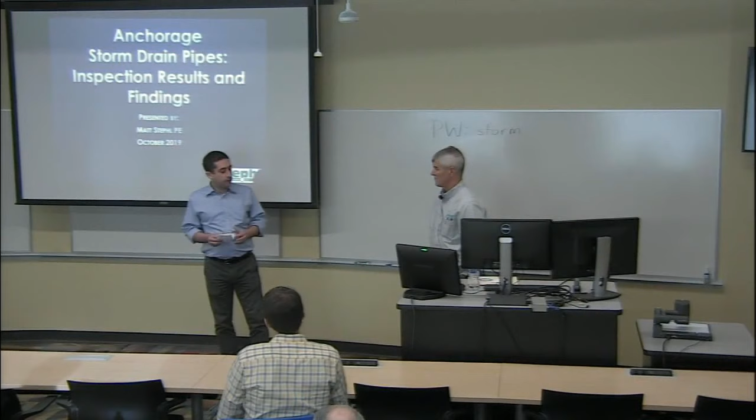Our presentation today is on Anchorage storm drain pipes, inspection results and findings. And our presenter is Matt Stephl. He's a PE. So I'll let you introduce yourself.

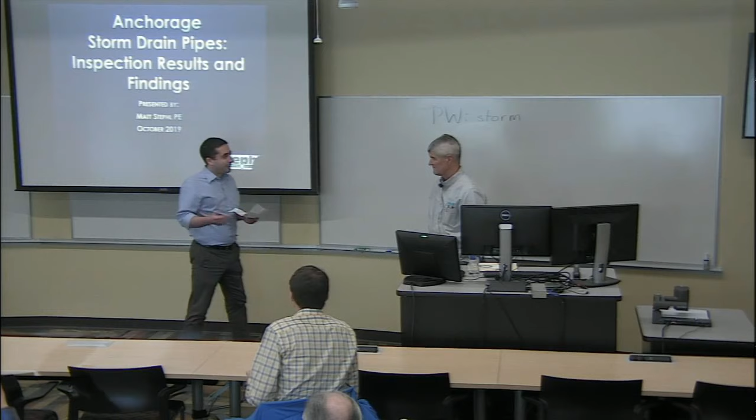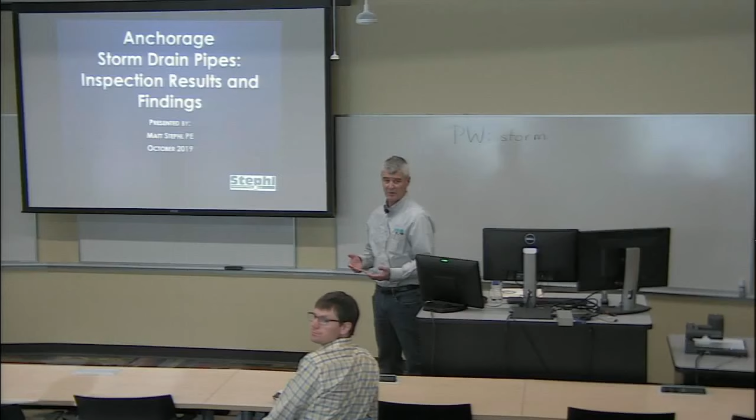The topic is Anchorage storm drain pipes, inspection results and findings. My name is Matt Stephl. I own an engineering company here in town. We specialize in condition assessment. We inspect pipes, underground pipes. We also specialize in repairing those pipes with trenchless technology. So the talk today is really a big part of the business that we're involved in here in Anchorage.

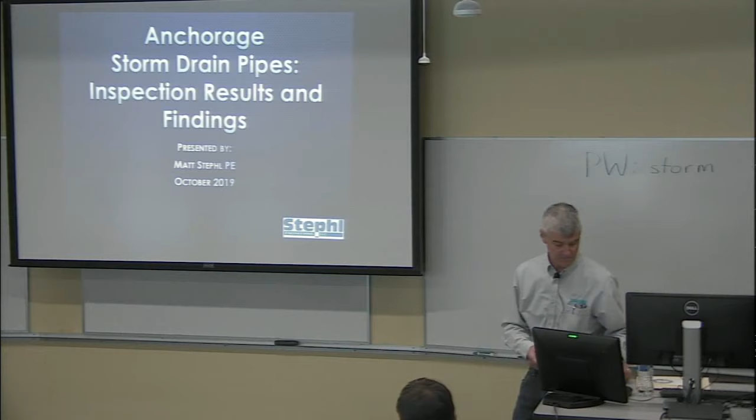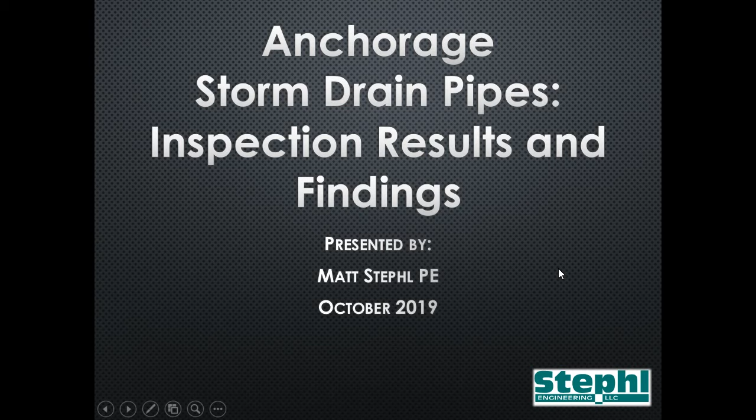See if I can get this thing to work. Here we go. Okay, thank you. All right, we'll keep moving here.

A little background about the topic for today. Anchorage is right now forming a stormwater utility. It's going to encompass all the stormwater pipes in the greater Anchorage area. The majority of the pipes are owned by the city of Anchorage, roughly about 80%. The remaining portion of the system is owned by the DOT, and there are some other private systems as well. One of the real driving factors here is that there are well-known serious problems with the corrugated metal pipe in the existing system. And that's really what the talk today is about.

As you well know, this issue is getting a lot of press lately. There was a newspaper article just this week on Wednesday on the front page about fixing the aging drain pipes as the city pursues a new stormwater utility. There have been a number of topics in front of the Anchorage Assembly about this issue. Some ordinances have been passed. They're moving forward, and they've also had some engineers and consultants involved in developing documents for them, which I'll talk about today.

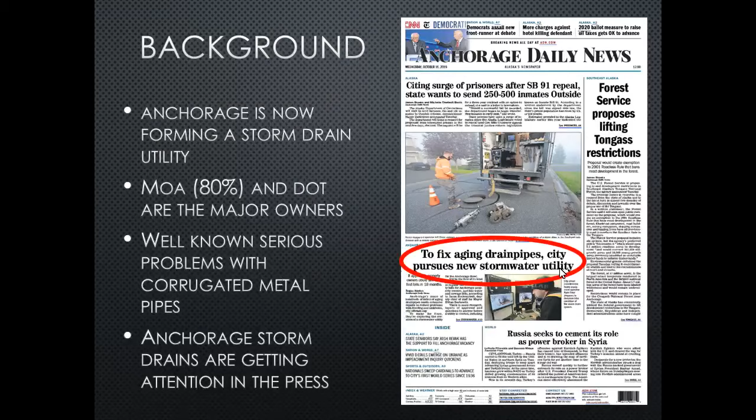And that's the wrong way. There we go. So what does a stormwater utility do? The primary purpose is to keep the storm drain system operational, make sure it functions correctly, maintain it, clean it, etc. And the purpose is to minimize problems in the city. Sinkholes, flooding. The picture on the right is a photograph of a flood caused by Chester Creek in the area of Arctic Boulevard and 19th Avenue.

Defective storm drains can cause property damage. Emergency repairs. It's interesting that I'm here in the UAA building today, and there's an emergency repair happening right next door on 36th Avenue to repair a culvert that carries Chester Creek, and they had that road shut down for a couple of months this fall. So that's one of the things that a stormwater utility would try to prevent, emergency repairs.

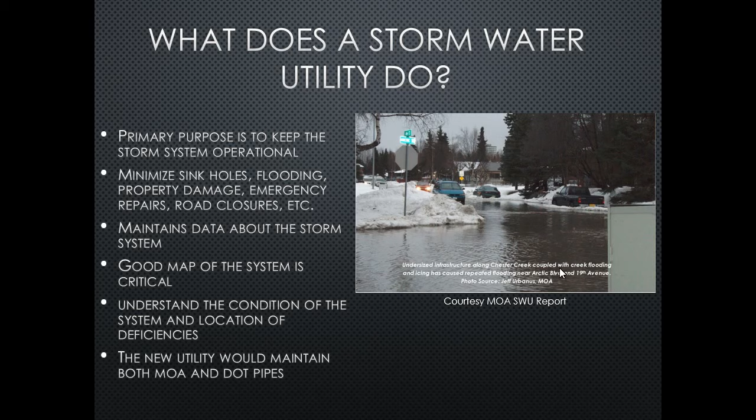A stormwater utility is also going to have a lot of good information about their system, mapping. They're going to understand what kind of condition their system is in, the location of where the problems are. And in our case here, the new utility, if it does eventually form, would maintain pipes that are owned both by the City of Anchorage and also the Department of Transportation.

So there was a study that was completed by the city. It was finished in January of this year. I'm going to talk a little bit about that. Basically, it's a guide for starting the new proposed stormwater utility in town. And it was completed by a number of qualified consultants here in Anchorage, some qualified engineers. It's a pretty good study. And they made some statements that I'm going to visit here. They identified that there's a lack of good data about the existing system. And we know that from our personal experience working on it.

They determined that the storm system in Anchorage is about 525 miles long. That's the pipe portion of it. That doesn't include the open channels and the streams, etc. Their report did not include any field inspection work, which is what I'm going to talk about today. But what they did do was a desktop analysis of the condition of the existing system, and that work was finished late in 2017, so it's about 2 years old right now. But it was a desktop analysis. They really didn't do any field work. They interviewed engineers who work with the city. They interviewed O&M staff and talked to both state and City of Anchorage engineers.

In that report, they estimated that about 70% of the system here in Anchorage is corrugated metal pipe. That's about 380 miles of corrugated metal pipe. They also made the statement that all that CMP pipe is at or near failure today. Then there was a statement early in this study that MOA staff had predicted that it could cost up to $1 billion to bring this existing storm system up to standards. That's a big number for a community like ours.

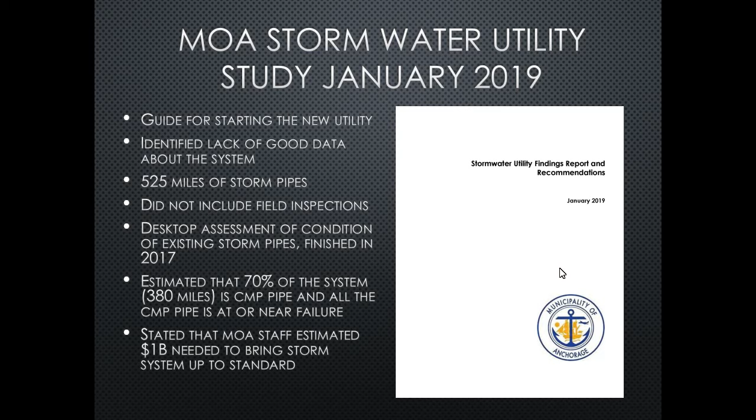So today, what I'm going to talk about is CMP pipe and its failure mechanism. I'm going to talk about the condition of the Anchorage system based on some work that our firm has done recently, and then I'm also going to evaluate the results of the field data and give you a little bit more information about what the findings were from the work that we did.

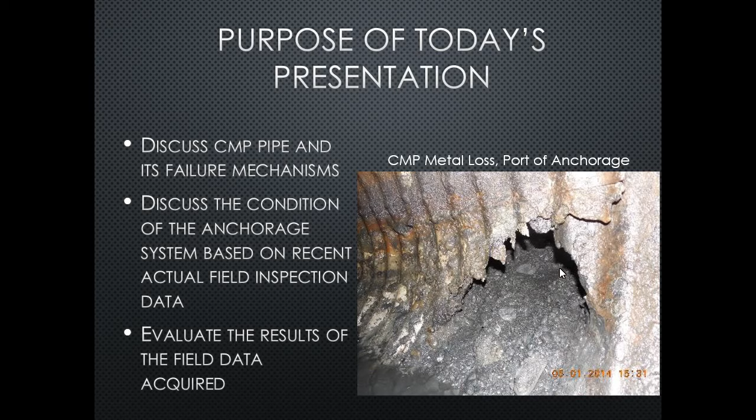And here's a picture right here, a classic CMP failure. This is a CMP pipe located down at the Port of Anchorage. The sidewall is missing, got soil coming into the pipe. This happens to be a piece of CMP pipe that gets submerged in tidewater twice a day. So very, very susceptible to attack by corrosion.

In Anchorage, predominantly most of the pipe is galvanized steel pipe. There is some aluminum pipe in Anchorage, but the majority of it is galvanized steel. There's a lot of different variations of corrugated metal pipe. Some of it's riveted. We've seen a lot of older ones that were riveted together. There's tar coatings. Some of the CMP pipe available today has a polymer coating on it. So there's a lot of variations in this, but basically it's a pipe that uses the corrugations to make it strong and also reduce the thickness of the metal.

So joints in the CMP pipe are typically bolted together with a coupling. Here's a photo of a coupling. It's a bolt just like a compression coupling. Most CMP pipe at the coupling has some sort of a rubber gasket. They're not completely watertight. For the most part, they leak. We see a lot of CMP pipe that was assembled without even having a rubber gasket in it.

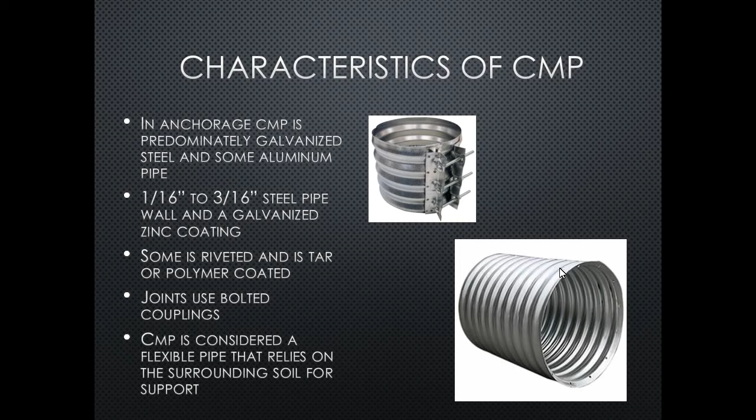One thing to remember about CMP pipe is that it's considered a flexible pipe, similar to plastic or HDPE. It relies on the surrounding soil to support the pipe itself. That's not so critical in the smaller diameters, but it is critical in the larger diameters, where you need strong soil around the pipe to keep it from deforming or collapsing from the top down. So the failing of CMP pipe is a serious problem in the Anchorage storm system.

And a little bit more about corrugated metal pipe. It was patented in the 1890s, which was a surprise to me. I didn't realize that it had been designed that long ago. It really came into use in America in the 50s when President Eisenhower provided funding for federal highway projects to build an interstate system across America, which was really about being able to transfer the military from one part of the country to the next. So they had all these federal highway projects. CMP pipe became very, very popular at that time.

And the reason is because it was a lower cost pipe. And why is it lower cost? It's because it has less metal in it. The corrugations make it strong, which results in being able to use a thinner metal. And you saw in the previous slide, that metal is 1/16 of an inch, an eighth of an inch, or 3/16 of an inch in thickness. So it's really pretty thin.

In our community, the Municipality of Anchorage, CMP pipe is roughly between 30 to 60 years old. The city of Anchorage began converting to plastic around 1990, which explains why most of the pipe in town is not any younger than about 30 years old. For the state of Alaska, their corrugated metal pipe ranges in age from about 15 to 50 years.

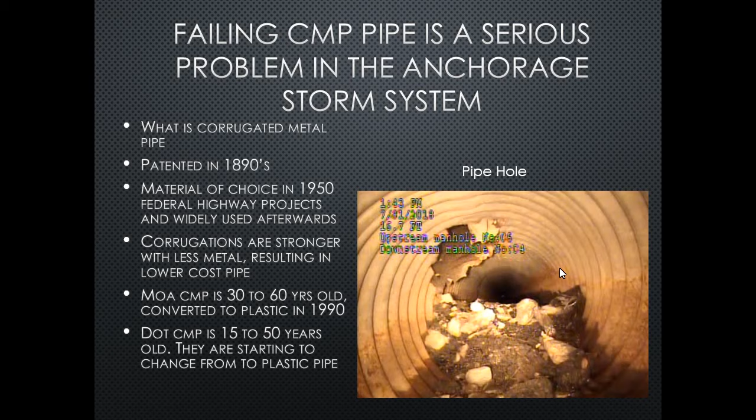Here's a picture of another defect in CMP. It's a pipe hole. You can see soil falling into the pipe. So I'm going to talk about the mechanism by which corrugated metal pipe fails. And the primary mechanism is corrosion.

On both the inside and the outside of the pipe. And water, if you have an aggressive water environment with a pH that's under 5 or over 8.5, that can aggressively attack CMP pipe, which is one reason why we have that kind of a problem here in Anchorage. We have a lot of swampy areas. Organic activity in swampy areas can enhance corrosion.

The damage is more serious, or occurs faster, where there is continuous water or standing water or flowing water. Anchorage has a lot of high groundwater tables. We also know from our own personal experience that quite a few of the pipes here in town are underwater, or the lower portion of them is underwater quite a bit. Or some of them flow continuously all the time. They're carrying some sort of groundwater from upstream or a portion of a river or creek.

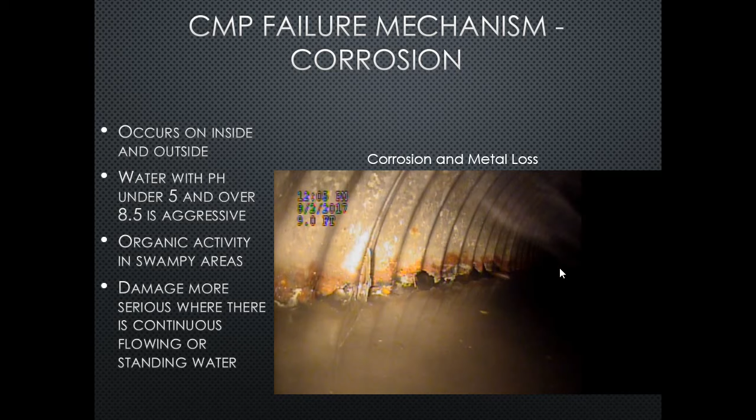Another mechanism of failure in corrugated metal pipe is abrasion. That's basically the wearing away of the inside surface from action caused by debris and sediment running down the pipe. CMP is more susceptible to abrasion than smooth pipes, and one of the reasons is because it's got these corrugations in it which create turbulence. And so the water's bouncing along, it's got some debris in it, some rocks or sand or whatever it might be, and they're striking the face of the corrugations as they rattle on down the pipe.

And eventually that material wears away the coating, the thin zinc galvanized coating on the corrugated metal pipe, then exposes the metal underneath it, which may then be attacked by aggressive water or something else. So consequently, when the pipe is in an area where you have flow and an abrasive action, it's going to be more susceptible to failing sooner.

And this picture here that you see on this slide shows some holes that have developed at the top of the corrugations. And that makes sense. The upstream side of the face of the corrugations, at the crown of the corrugation, is where you're going to see most of your abrasive activity, and that's the first place where you're going to begin to see corrosion attack the metal and eventually eat the metal away so you have nothing left.

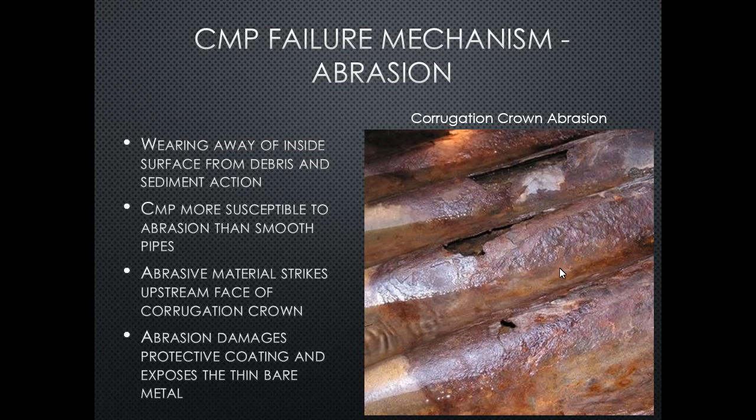One of the most common places that you see the failure in the CMP is in the invert, which makes sense because that's where you have the water, that's where you have the abrasion activity occurring. And in Anchorage, the majority of the culvert failures happen in the invert area. Usually that portion of the pipe's underwater, probably due to something that's in the liquid itself.

We do find cases where the corrugated metal pipe is corroded all the way around in a 360-degree circle. You'll expose a piece of pipe or you'll look at it with a video camera and it's got holes all the way around it. And in a lot of cases, that's the aluminum pipe. My understanding is the aluminum doesn't have any kind of a protective coating, and that pipe has been installed in some sort of an environment that's causing it to corrode in a 360-degree area around the whole entire pipe.

But for the most part, those are few and far between. I mean, they do exist, but the majority of the problems that we have in our community here are in the invert of the CMP itself.

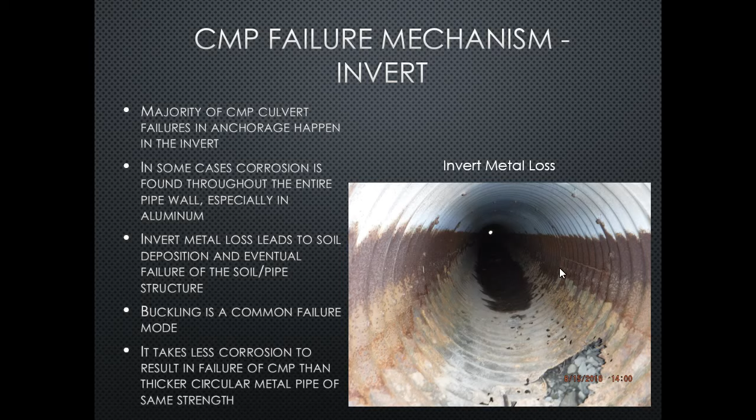So I'd like to talk a little bit about the projects that we accumulated today and we're going to present. These are projects that we worked on, that our firm did starting in about 2007. There are other projects that have occurred around town by other people in the cities and the state and also private consultants. But we took all of our jobs and I've combined them into one database and looked at the information as a combined set.

The total footage of our projects is about 160,000 feet. There are 19 different projects over about 30 sites spread out throughout town. And they varied in size, anywhere from 1,000 feet to, we had one project with the state that was 64,000 feet long that was just completed this year. So that's the field data that I'm going to talk about today.

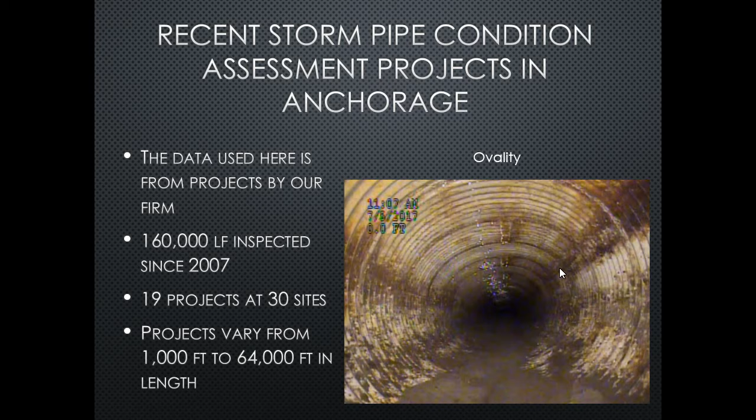When we inspect these pipes, we use closed circuit television cameras, which is the photo on the left down there. That's a typical storm pipe inspection camera. It's got big tires on it so it can maneuver through debris, which is pretty common in storm drain lines. We utilize a downhole zoom camera, which is the photo on the upper right. That's a pretty neat little tool. It's got a real strong beam on it.

A person can look at a storm pipe from the surface, and it'll zoom up a pipe up to like 300 feet if you have a pretty good reflection inside of the pipe you're looking at. It has the ability to record video as well as still photos. And you can get a lot done quickly because you're not having to mobilize the camera and run it up and down the line. So the limitation, of course, with the zoom cameras, you can only see so far, and you can't look at defects real close. But anyways, it's one of the tools that we use.

Some of the larger pipes are inspected with man entry methods. And then one of the things that we do too is we probe the inverts of the CMP with a hammer or a bar or a spud wrench or something to check the metal to see if it's soft or if there's no metal at all. And oftentimes the invert's under some debris or it's covered by water. You don't get a good look at it with the camera. So we use probing to check the integrity of the invert. And that's a technique that's been around for quite a while, actually, in regard to CMP inspections.

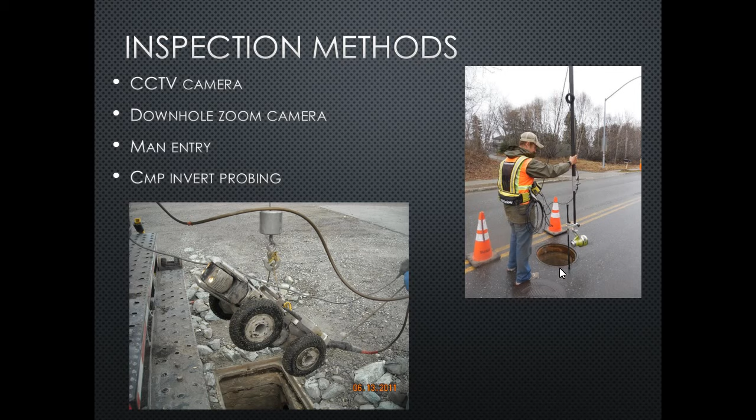So a little bit more about CMP inspections. They're a little bit different than your normal sanitary sewer pipe or other type of line. And it's important to have adequate lighting. A lot of storm drain lines are big, 36, 48. This image here is probably, I'm going to guess it's a 48-inch pipe. It's good to have good lighting so that you can see the entire pipe from the camera itself.

We pay close attention when we're doing these inspections to look at the flow area because, as I explained earlier, for the most part, if you're going to have a problem in your pipe, it's probably going to be happening down near the bottom of it. Camera speed is important; it's important to maintain the proper speed. If you go too fast down a corrugated pipe, the camera bounces up and down and it distorts the image. So we try to be careful. So you want to be cautious about going too fast.

A lot of storm drains have debris in them, a lot of water. They need some sort of preparatory cleaning, which makes the work expensive. We were involved in a lot of projects where there's just not enough money to clean everything and look at it 100%. So most of the people that we work with want to spend their funding on the camera imaging, not so much the cleaning portion of it.

So there are some cases where you can't inspect a pipe because it's got too much debris and other things in it that won't allow the camera to pass. Those cameras with the tires can only go through so much stuff. They can't motor through everything that's in these lines.

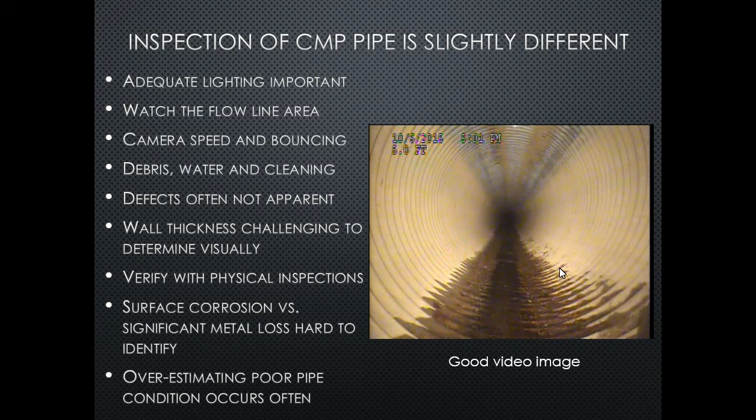So now I'm going to talk about the field data that we acquired over the course of the last 12 years. This map shows the locations. The red areas are the areas where the projects occurred, and in our projects about 127,000 feet of it was for the state, and 32,000 feet of it was for the city of Anchorage.

And that's in comparison to the storm drain system, which contains 80% city pipes and something less than 20% state pipes. So the majority of our information is based on DOT pipe inspection work, but one of the large DOT projects was the one in the fourth bullet here, which was the 63,900 foot DOT NHS project, National Highway System Project, which included 10 streets located around Anchorage. And there they are, A Street, Old Seward, International, Dimond, DeBarr, Muldoon, Ingra. They were pretty much spread across the Anchorage Bowl area.

And the thing that I want to point out here is that even though these were owned by the state, not by the city, they're located in the city, and they're surrounded by pipes that are owned by the city of Anchorage. So for the most part, you're going to hear me recommend that this project that was done for the state really also represents some of the conditions that you might see in the city of Anchorage pipes in those areas.

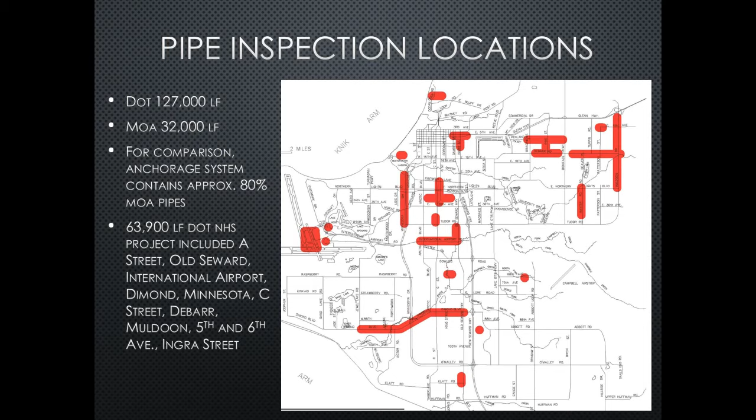So here's a table that's a summary of the different projects that we worked on and the data that we got from them. And hopefully you can see that. It's a table with a lot of information on it. I'll go through and point out some of the important details in the next few slides. But when you look at this table, you can see that it's been broken into city-owned pipes and state-owned pipes. And the left-hand column is the project name.

The numbers next to those project names kind of signify what year they were done in, 08, 2012, et cetera. You've got a column that tells you how many feet of pipe we inspected on each project. The number of segments, that's the third column. And when you look at these jobs, you're always trying to figure out how many different segments you have. A segment basically is one pipe from end to end, one manhole to one manhole, or a culvert opening to a manhole, something like that.

There's some other data here we'll talk about on the next few slides. Some comments about the overall condition, and then finally on the right-hand side, a note about whether or not we probed the inverts on the project.

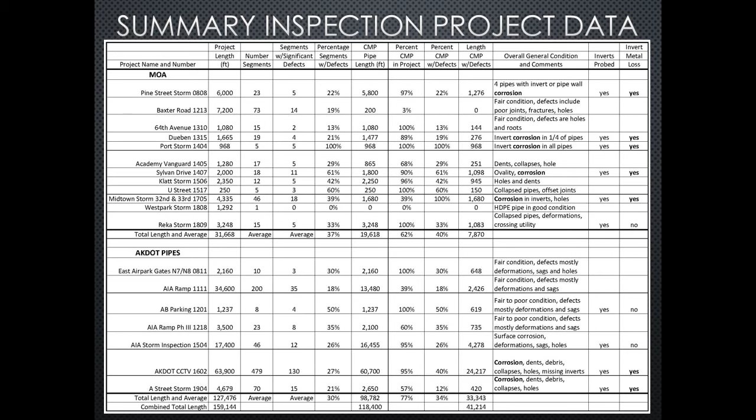So first thing I'd like to point out about the information that we accumulated here is we found a lot of corrosion, and that's what these red circles are showing you, that on 1, 2, 3, 4, 5, 6, 7, 8 projects out of 19, roughly half of them, we identified corrosion within the pipes. One of them, the third one up from the bottom, is surface corrosion. That was identified on a project that was performed at the airport. But all the rest of these are corrosion in the invert that is serious enough that there's some metal loss involved, and the pipes are in pretty poor shape.

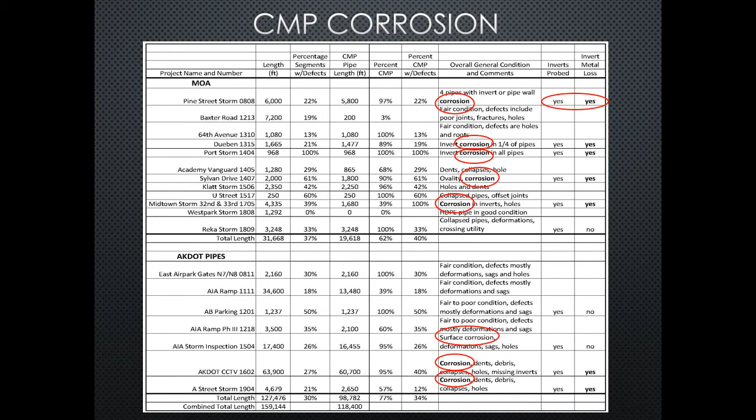So those corrosion notes are also related to the invert probing, which are the two columns on the far right. And down near the bottom of the table, you can see where we probed inverts, and there was no metal loss. In some cases we found metal loss, in some cases we didn't. But that again just reiterates that in our community corrosion is a big problem with the CMP pipe, and it's noted here on a number of different sites that we investigated.

So let's talk a little bit about some of the significant defect data, which is outlined in this red box here on the table. The one thing that we did is we determined how much CMP was in each project, and what percentage of pipe in that project was CMP. That's what the first two columns represent. Like on the city of Anchorage pipes, which were a total of 32,000 feet, roughly 20,000 feet of that was corrugated metal pipe, or about 62%. So that compares favorably with what the recent study said, that 70% of the pipe in Anchorage is corrugated metal pipe.

On the Department of Transportation projects, which is in the lower half of the table, the CMP portion was 77%. So both of these are within the 70% realm that came out of the findings of the desktop analysis done in the recent storm drain report. And then finally, the third column in this red box tells you what portion of that CMP was considered defective. And it varies from a little bit to a lot.

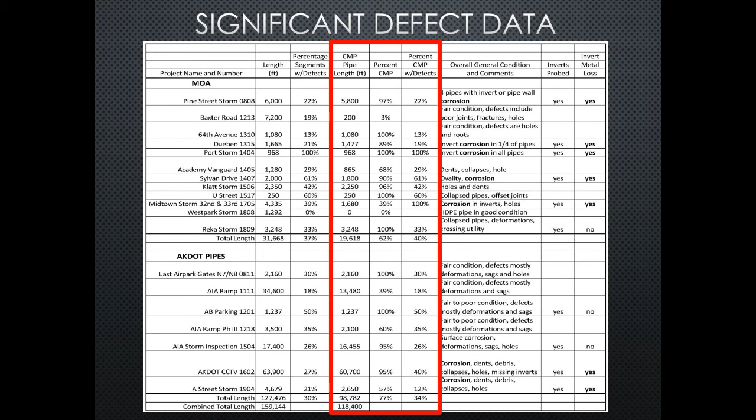And the pipes here were put in about the late 70s, early 80s. So they're not new pipes. They're 40 to 50 years old. So this is kind of an interesting example of a place where corrugated metal pipe has managed to survive longer than other parts of town. And you ask the question, well, why is that?

And the reason is, or what we think anyways, is that the airport ramp is pretty flat. It is flat. And the storm drain lines at the airport are on real flat slopes, on minimum grades. They're trying to prevent them from getting too deep, which means that the velocity in the pipes is relatively low, the flow velocity. And the other factor that comes into play is that they don't put a lot of sand on that ramp.

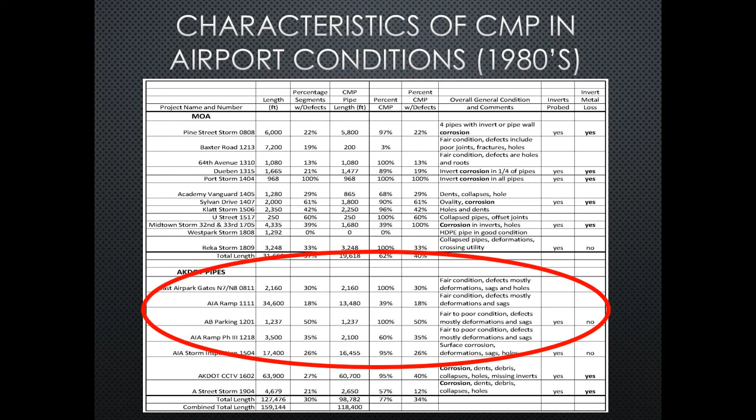So I'm going to talk a little bit about the results from the Department of Transportation National Highway System storm pipe inspection work that we did. This is the project that involved almost 64,000 feet of pipe. It was completed over the course of 2.5 years. And as I said earlier, this is a good representative of the conditions of the pipe in Anchorage. It's a pretty comprehensive report compared to some of the other work that we did.

Some of the other investigations that we did were just mostly, hey, we want you to inspect the pipe and tell us what kind of shape it's in, and that's it, right? Tell us what condition it's in. We'll figure out what to do with it from then on.

But on this project that we did for the Department of Transportation, they asked us to not only inspect the pipe, they wanted us to tell them what kind of condition it was in, and then they wanted us to make a recommendation on how to repair it, and also provide them an estimate of what those costs would be if they went out and did the repairs. So it was a little bit more comprehensive than some of the other projects that you saw on the previous list. And as I said earlier, there were about 10 sites located all over town.

So a little bit of information from this project. So 27% of the pipe segments, or 27,000 feet, was identified as needing repairs now. So those are defects that when we looked at them, we said this utility owner is going to want to repair these things soon. There were obvious defects, holes, soil coming in through poor joints, things like that.

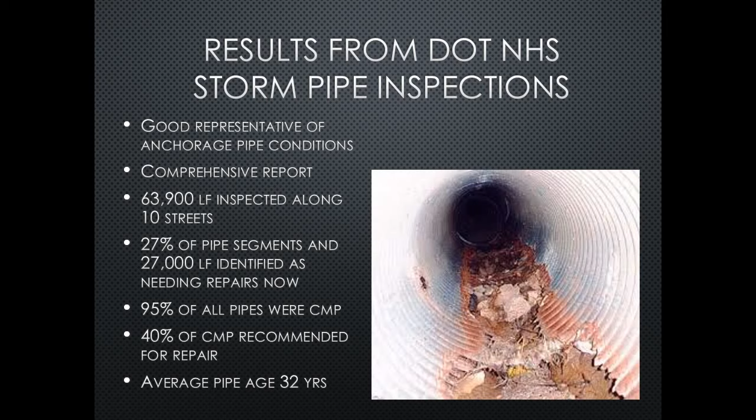So on this job, 95% of the pipes were corrugated metal. So we had an opportunity to look at a lot of these kinds of pipes, and about 40% of them were recommended for repair. And we went back and looked at some of the record drawings to figure out what the average age might be, and it was about 32 years. It seemed like a lot of these things were installed in the 70s and 80s when Anchorage grew and the streets were being upgraded, et cetera. So for the most part, the pipes that we looked at were not newer CMP installations.

So this is a little bit of data about the costs that were generated from this project. We estimated that it would cost $7.9 million to repair the 27,000 feet of pipe that were identified for needing repairs. These costs are based on actual bid numbers that we have accumulated over the years for a handful of different types of repairs. And so we had unit costs for different types of repairs. We applied them to the pipe defects and eventually came up with this total construction cost of $7.9 million for the 27,000 feet of pipe that we identified as having defects.

So if you just take this number and begin to extrapolate it out, which we didn't do in this study, but that's what I'll talk about here. If you added, let's just say, for example, 35% for engineering administration, maybe some pre-CCTV investigation work, your repair cost starts to jump up to roughly $10.7 million. And then if you took that $10.7 million and said, okay, what does this turn into on a price per foot basis to repair the 27,000 feet of pipe, it works out to be about $400 a foot, which turns into a big number when you start dialing up the footage that you're going to fix.

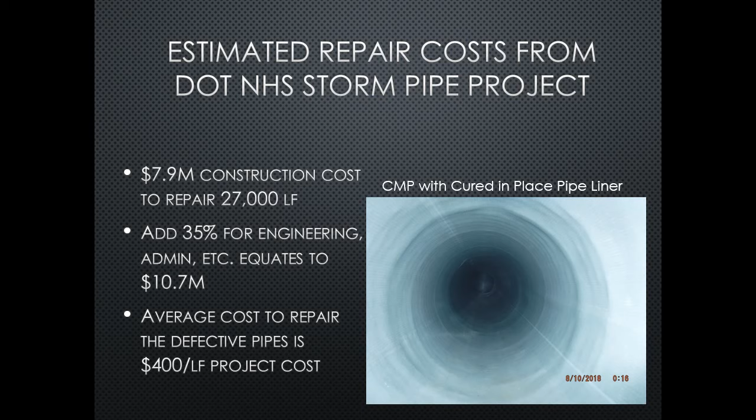So if we look ahead a little bit at the city's portion of the pipes, the field data showed that 40% of the city of Anchorage CMP was found to have defects. If you remember the chart from before, the upper part had all the city's pipes categorized. 40% of the CMP in those lines was defective. And in that single DOT project that included 64,000 feet of pipe, the result was the same. 40% of the CMP pipe in those DOT highway systems was slated to be repaired.

And that just happened by accident. I didn't put that number up there to make it look good; that's just the way it worked out. I think the city of Anchorage pipes are probably slightly older overall versus DOT pipes, which makes sense because the city converted over to plastic in about 1990, but the DOT continued to install CMP. So overall, if more work were done here, you would probably find that the Anchorage pipes are slightly older than the state lines.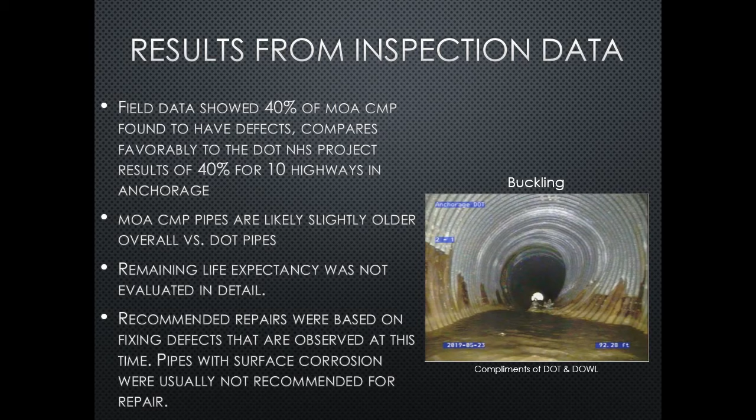So if you take the information that we pulled together and looked at how it might affect the city of Anchorage, the study estimated that there was 380 miles of pipe. Actually, I'm talking about the storm system as a whole.

You get a question from online? Okay. I'll answer this question when I get done here.

So from earlier, we learned that there was roughly 380 miles of corrugated metal pipe in the Anchorage system. This is both state and city. And if you just took the assumption that 40% of that CMP needed to be repaired, and used this $400 a foot number that we came up with from one of our projects, you're looking at a total value of $320 million to fix what may be defective today.

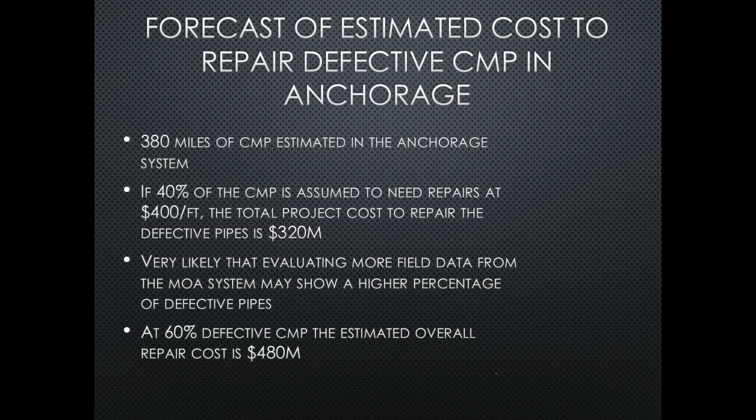And it's very likely that the number might be higher than 40%. When you talk with people that work on the systems all the time, they think that the portion of CMP that's defective is larger than 40%, and I can understand that. The study had a higher value. So if you took the 40% and bumped it up to 60%, you're looking at an overall repair cost of roughly $500 million. So that's a big number, but that's just when you take our field data and massage it a little bit.

So in conclusion, just a couple more points here. Yes, improvements are being made here in Anchorage. As I talked about earlier, the city is implementing a much needed stormwater utility. The Department of Transportation is building a database. They're putting their video and pipe logs into a GIS system. That also will include other information, record drawings, et cetera. The project that we did for them was kind of the beginning of building that GIS system.

And we've actually been involved in some projects since then where they're taking the information and starting to add to it. The Department of Transportation recently purchased a TV camera so they can inspect the pipes themselves. And the city purchased a camera as well, I think it might have been their second version. That was a little bit of what the article in the paper on Wednesday mentioned, and looking at the pictures, they've got a storm drain camera that looks pretty modern. So both of these owners are beginning to make some moves in terms of taking care of their storm drain pipes.

Another bullet: CMP life expectancy can be longer in the right conditions, and I think what we see at the airport on the ramp is an example of that. There's probably some other parts of Anchorage where the conditions might be good for CMP. An example might be the downtown area, where you've got pretty good gravel subsurface soils, low groundwater tables, and corrugated metal pipes at pretty flat grades. We personally haven't done a lot of inspection work down there, but that might be a place where you might see CMP last longer than other parts of town.

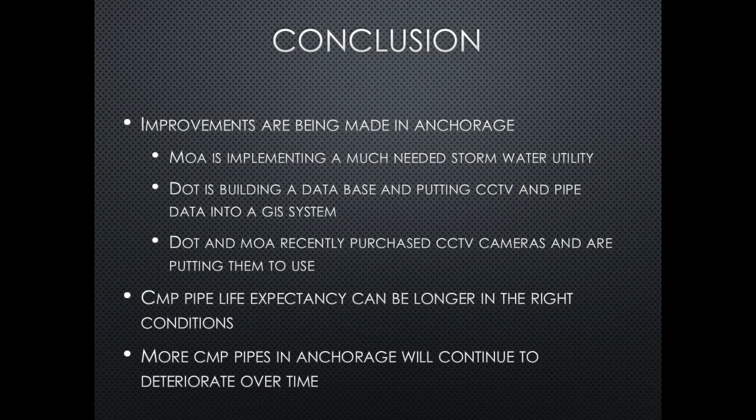So I'm going to answer any questions, and let me do this one that came online first.

So the question is, does a CIPP solution account for a change in conveyance? And I think I might have answered this once before. No, when you put a CIPP liner in, it basically has the same diameter as the host pipe. And for corrugated metal pipe, you could probably expect a little bit better hydraulic capacity because the liner is smooth and it has a tendency to smooth out the corrugations.

But for the most part, we often just say if you're going to put a liner inside of a corrugated metal pipe, you might be stepping forward a little bit too much to assume that you're going to get a higher flow capacity out of that pipe. Any questions from the audience?

What's the life expectancy for CMP versus plastic pipe? CMP versus plastic? The question is, what's the life expectancy for CMP versus plastic? I honestly don't know. I'll tell you what, I looked online today at a Contech website, which is a CMP supplier, and I saw numbers in there like 30 to 50 years for CMP, right?

But I can tell you from our own personal experience, we've looked at some plastic pipe in Anchorage during our inspection work, pipe that was installed quite a while ago, and it's really in very good condition compared to CMP pipe in that same project area. But I don't know the exact numbers. I think you could probably safely say that it's going to last longer here in town than metal. That answer your question, sir? Yeah, I'm just kind of curious. Okay.